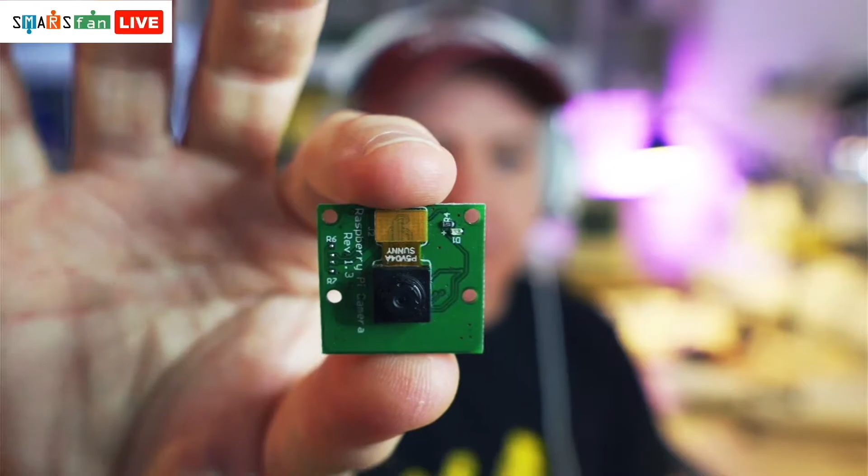So it comes in two parts. There's a back piece and then there is a front piece. And if we get our Raspberry Pi camera, there's the Raspberry Pi camera module. It hasn't got the ribbon installed yet. And we try and put this in there.

Although it looks like it might actually fit in there, there is a very large hole at the front, and there's no way for this to actually go inside the actual holder. If I can show you that, it doesn't quite fit. So you try and squeeze it in there. There's nowhere for the ribbon to come out. It doesn't really work. And on the version that I printed out, I think it was actually the PLA that was the issue here, but this actually snapped off.

So I thought we can do better than that, and I thought this is quite an interesting exercise to do. You know, how do we solve a problem like this? We want to design our own camera module holder. We've got the tools such as Fusion 360. So how do we do this?

So that's what today's episode is all about. We're going to use Fusion 360. I'm going to build a new camera module from scratch. So what do we need? We need a Raspberry Pi camera module and we need Fusion 360. So that's the Raspberry Pi camera module that I've got.

And what do we need this to do? Well, we need a hole for the actual lens itself. We need a ribbon hole, so when the ribbon goes into it, we've got somewhere for it to come out.

And what would be really cool for bonus points, if we have time, is rather than having this round connector on the back which connects to this sort of array - see, I've got a piece of blue tack there just holding that in place. At the moment this just kind of wobbles about, so I just put a piece of blue tack in there to sort of hold it into place a bit.

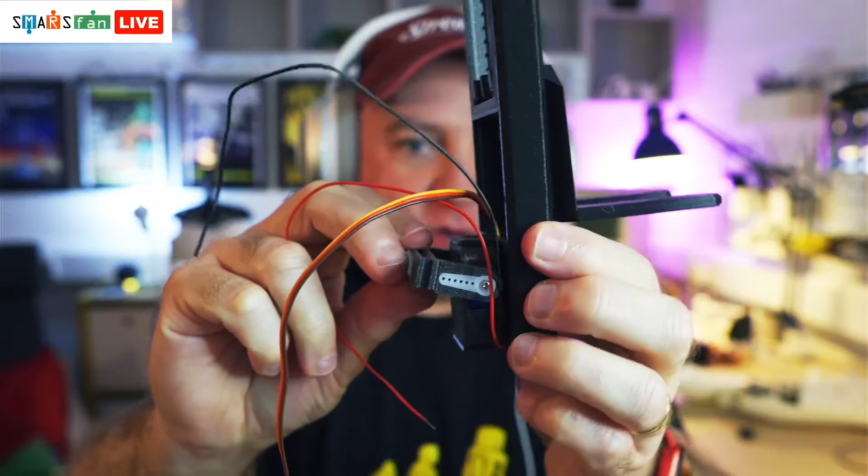But what would be really cool is if we could have a servo that can actually position the camera up or down, a bit like we have on - I'll just pull one of these up here - one of these module holders. So there's essentially two parts to that. If we just move this away, this is the forklift thing. So there's a servo holder in there. You can just see the servo horn there, and then this slides into the top of the SMARS. So it'd be cool if we could have something like that for bonus points. Might not have time to do that today, but that's certainly where I'm thinking we should go with this.

Okay, let's get back to our keynote and back to that. So that's what our requirements are for this solution. And the dimensions - this is all about measuring things and being quite accurate with this.

So I have a pair of digital calipers, and these things are actually on all the time. I don't know if this is just a cheap digital caliper. However, it appears to be switched off. As soon as you sort of move this in any way, if you just open this up, you'll see it springs into life there. And there's a tiny little watch battery in there. And because this is essentially always on, these things don't last very long, the batteries. So I've seen people hack them together where they've got a battery stuck on the top or duct tape to it or whatever. Just something that irritates me.

Anyway, so we have our calipers, and one of the things we'll be doing is measuring exactly what the dimensions of this are.

So for example, on there you can see that's roughly 24.8 by about 24. It says 23.93, so it's about 24.8, 25 by 24, something like that. So we have some measurements that we can start taking there.

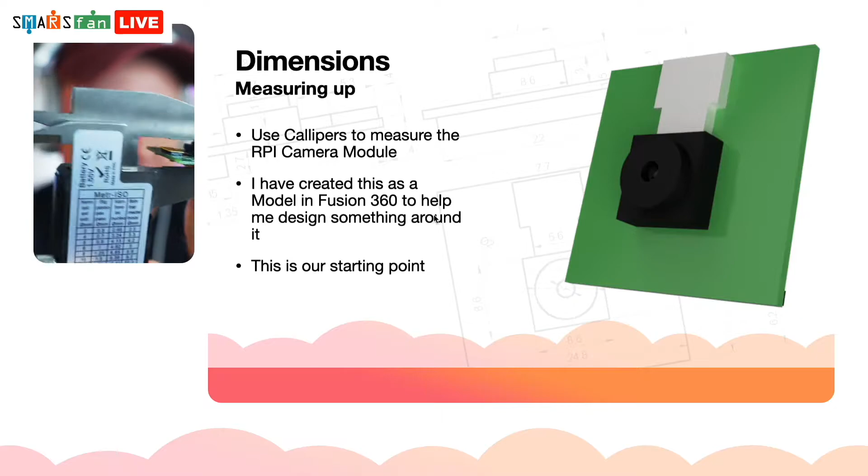And we have to measure things as well, like the height of this thing. So what's the total height, including the little ribbon connector there. If I show you that in a little window, you can kind of see what we're getting, and that's saying about 8.2, something like that.

So I've written all these measurements down, and what I've actually done is model this in Fusion 360 as a component that we can pull in, because it's much easier to build around that. Essentially we want to get this and then encase it in some kind of module that's got the right connectors and the right holes on, and then slice it down the middle. So it gets quite an interesting problem to solve.

So that's our starting point. As you can see, or maybe you can't see there, I'll help you with that in a moment. I've modeled this, and in Fusion 360, once you've designed something, you can actually create a sheet from that, a drawing that has all the measurements on with all the different views - a top view, a side view, front, back, all the different orientations.

You can even do a section analysis where you slice through the middle of it if that's important. What this means is that you can pass this to somebody else and they can recreate this very easily. So I'm quite a big fan of these, and it takes me back to my days of high school.

When we used to do, what do we call it, graphic design, or technical drawing, that's what we called it. We had pencils, and we had the big sort of boards where you'd get the paper on there, you clip it on, and you'd have to draw out things. We drew things like the Volkswagen logo. I remember that being one of the things we had to learn how to draw. This is kind of the thing we had as a sketch to draw from.

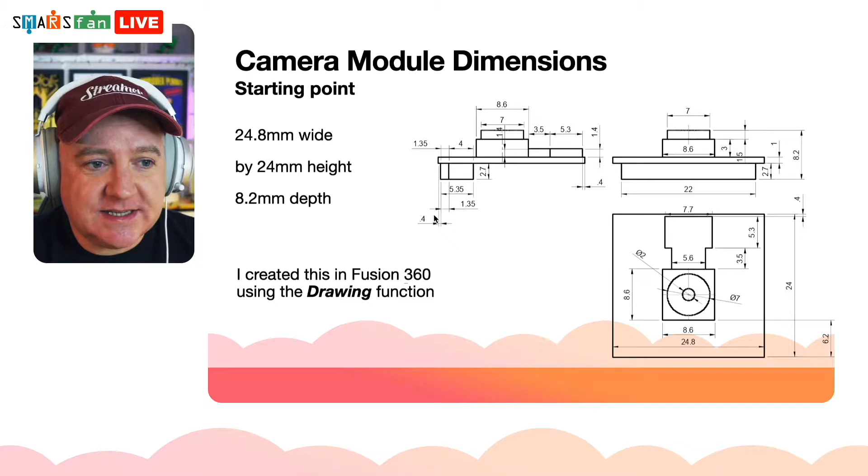So that's our starting point. I've created that as a drawing, and you can get a copy of that if you want as well. So I've created that as a PDF.

What we want to actually end up with is a module that has the Raspberry Pi in the middle, and it's going to be encased by a top half and a bottom half. The idea being that these top and bottom halves are perfectly designed so that they have all the supports and everything needed, so that thing is snug and enclosed properly. We also want it to look like the SMARS kind of design language, so we'll talk about that when we get to it.

So like I said, there's a top half and a bottom half. There's a hole for the camera lens that's the right kind of size for the camera, rather than having the great big hole that this one has. It's a push fit connection, so when we print it, we don't really need to do anything else other than push these together, and there'll be a friction fit. And we have a hole as well, you can probably just about see it there, for the ribbon cable to come through, and on the bottom half there's a cutout for that too.

So I've actually printed one of these. That's what I have installed on this guy here, and I have another one, a slightly different prototype I'm currently working on too, which is just here. It's got a Raspberry Pi 4 just dangling on the top there - it might be a 3 - but yeah, it's got the same kind of module there on the front too.

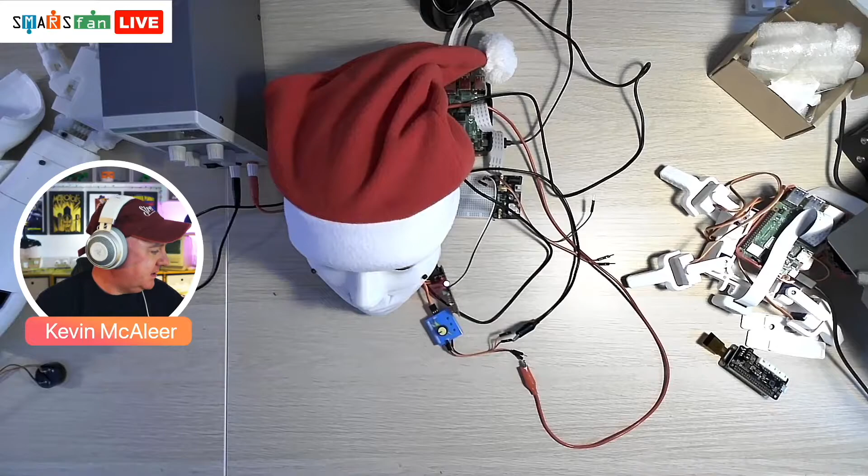It's demo time, and I've got a note to myself to play some cool music in the background, because we're going to be doing a lot of talking and clicking, so it'd be nice to have something playing. I've got a bit of a playlist here we can use. I'll just need to turn the volume down a bit since it'll be quite loud. Let me play that. If I put it down to about there—how's that? Not too irritating.

Okay, so what we need to do now is go over to Fusion. Let's get to it. I've got Fusion 360 loaded up here. This is free software if you're a hobbyist or a student in education.

You might have to find your way through the Autodesk licensing system to get the license, but I found it quite straightforward, and they're always updating the software. This is the best software on the market for doing 3D design, especially if you want to take that and put it onto a 3D printer and print a model. I find this is just the best software, bar none, and I've had to play with a few of them to make that assessment.

So this is what we're using. I've got two setups here—one view, and a slightly more zoomed in version I can click to if something's not quite visible on the screen. Okay, so the first thing we're going to need to do is create a new sketch.

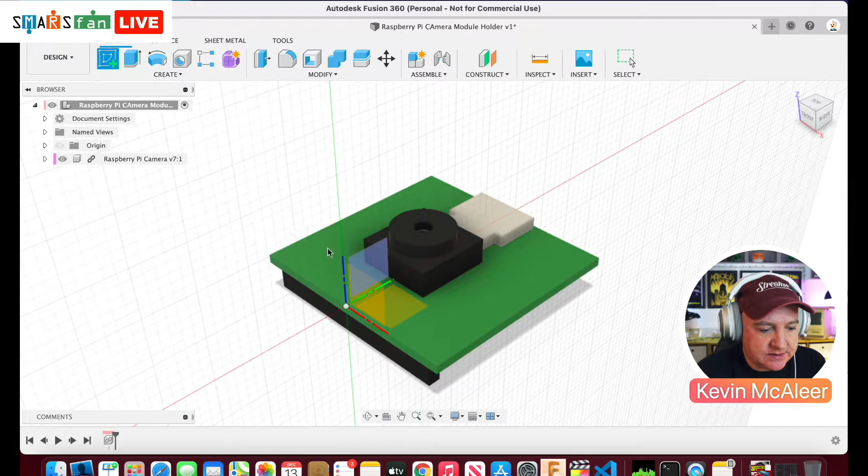Let's do that on this plane here. We can hide that Raspberry Pi module when we don't need it, and bring it back just by pressing this little eyeball. The first thing we need to do is capture the outside dimensions of this module and then build out from there. So what I'm going to do is click on that.

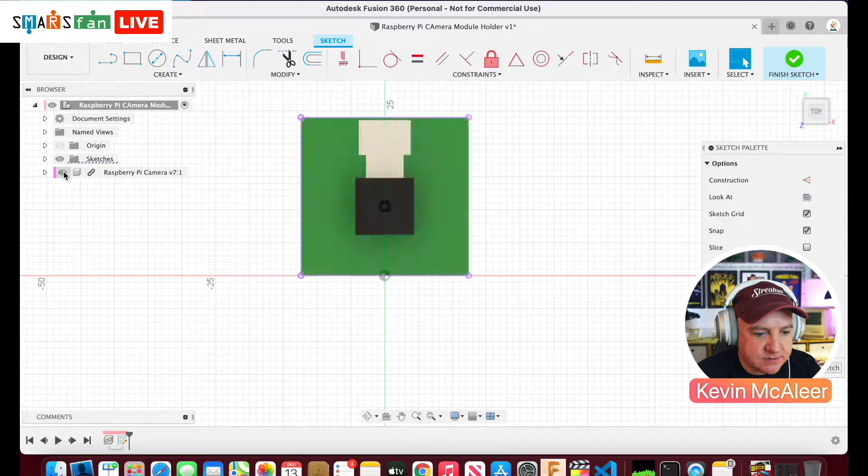I'm going to press P to project, and then click on the edges I'm after—just this edge, and this edge. So what that now means, if I hide that again, we can see we've got some—maybe I didn't quite click that one, let me do that as well. If I hide that, we can now see we've got the outline dimensions of that brought into our sketch.

What we need to do is just draw a rectangle which is exactly those dimensions. If I just do that—there we go, oops. Okay, so we now have that captured in our sketch, and what we want to do is build an outline around that.

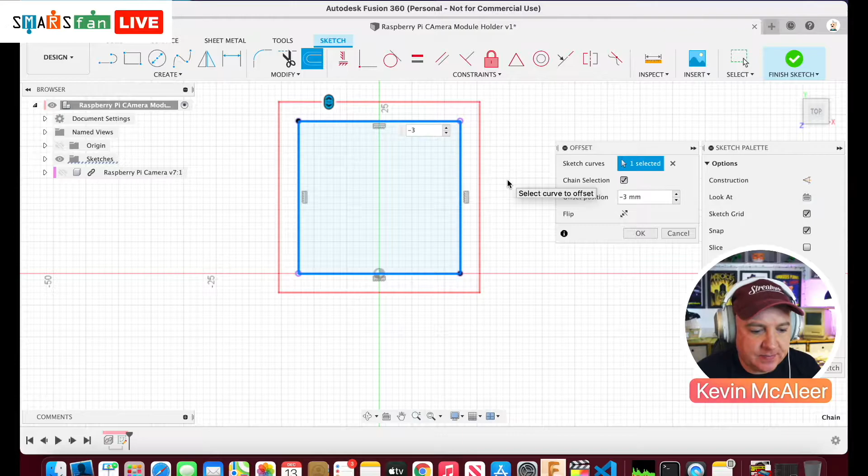There is actually a command for doing offset. If we do -3, that'll offset around the outside of the camera. So this is going to be like the thickness of our case around it. Let's click OK on that. So that's our first sketch done.

That's nice and simple. What we're now going to do is extrude that out, pull that out. So if we go to our 3D view of this, what we want to do is pull this out. I'm clicking into that area there, and I'm going to press Q to push pull, and you can see there we can pull and push that shape we've designed. We actually want to pull it out about 5mm, so I'm just going to type 5 there, press OK. So we've now got kind of a square hoop kind of shape.

And if we bring back our Raspberry Pi, we can see that perfectly encloses that.

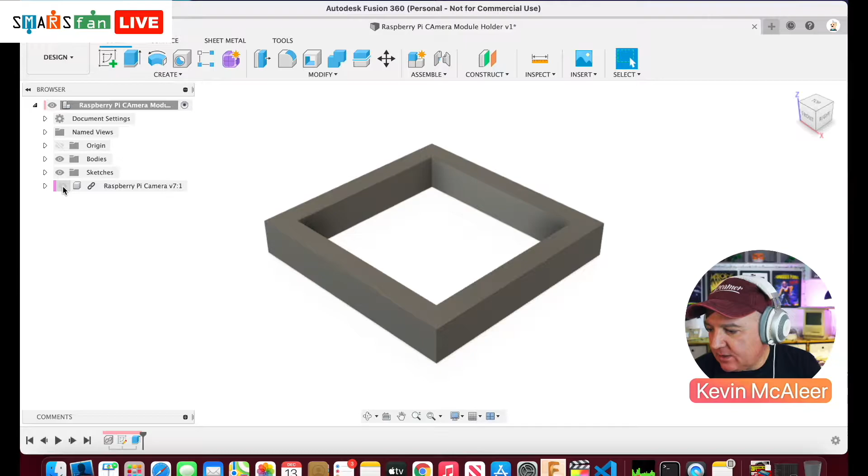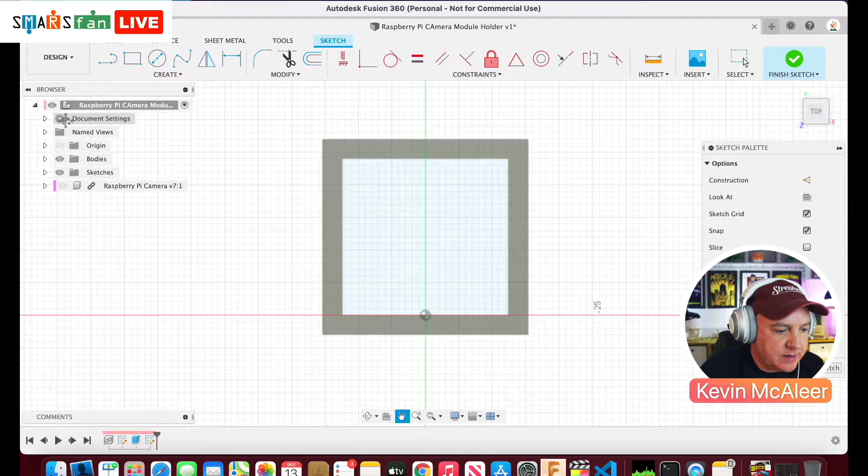Okay, so next what we need to do is draw a sketch on the top of this surface here. So I'm going to click that, go to create new sketch, and let's just bring that down. Why is that? There we go. Okay, so what we need to do now is bring back the Raspberry Pi camera.

I want to draw a circle exactly where the lens center is. So if I zoom in on this, let's just zoom in on that. Exactly where the middle of this is, that's kind of what I want to do. So if I do P for project again, I can actually find that circle there. I'm just going to bring that in. That's all I need, because that's where the light goes into the camera.

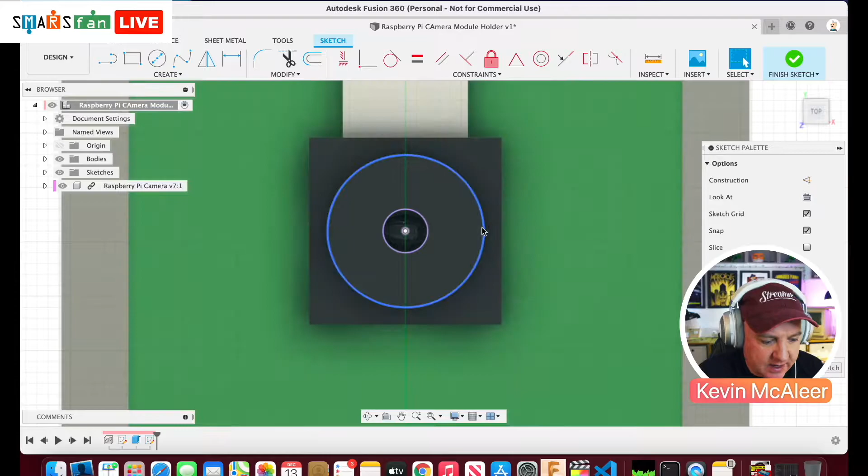Everything else is just for show, but we might actually make a similar one that goes out around the outside as well, because it just looks nice. So I'll do that, pull that one in as well - P for project, bring that in too, and then do an offset around the outside there as well, and that offset is going to be 1mm around the outside, so that's fine. And that will be the gap. Everything within here, if I just show, all of that area there will be the hole.

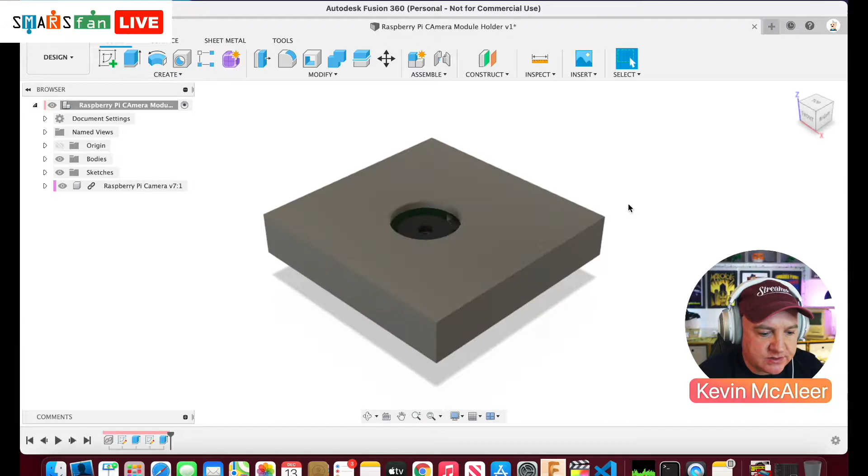Okay, so that's the next bit we need to do. So what we now need to do is go back and finish that sketch. We can now bring everything we want to pull up, but not the hole in the middle - just this outside area here and here. Press Q to push pull, and we're going to pull that up just 1 millimeter, like so. So now you can see how this is sort of coming together.

Okay, so what we now want to do is go to the bottom half of this face here, and we want to do a push pull down on there as well. So if I do Q, I can actually pull that down by 4 millimeters. And if we look on the side there, we've kind of completely encased that Raspberry Pi within the case.

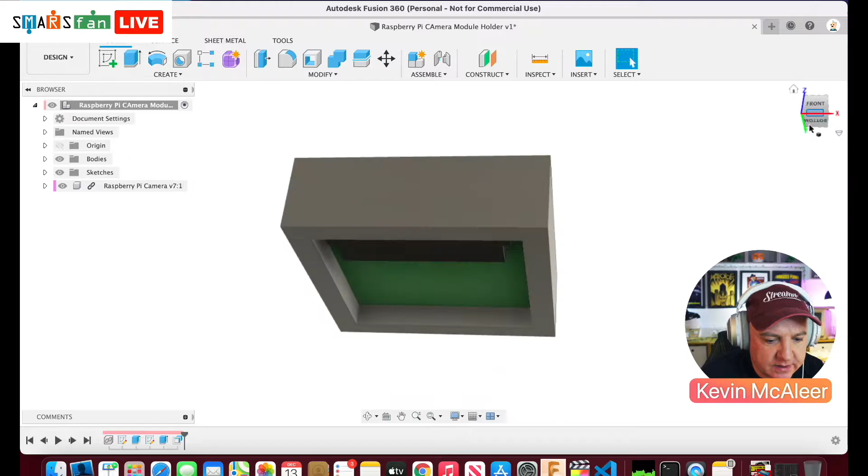Okay, so what we want to do now is fillet the edges. Let me just make sure I've done that correct. No, I've not - there's one more thing I need to do on the other side on the bottom. So let's go back onto the bottom there. I'm going to select this face, create a new sketch on there, just move that to there. And I'm just going to do a rectangle from that corner to that corner there. Make sure that is... it's not quite getting it to the edge there. There we go, perfect. So I now just want to grab that and that, pull that down by 1 millimeter.

Okay, so now we've completely encased our camera. Camera's inside, there's a hole for it to come out, there's no ribbon hole yet, and it's looking quite blocky.

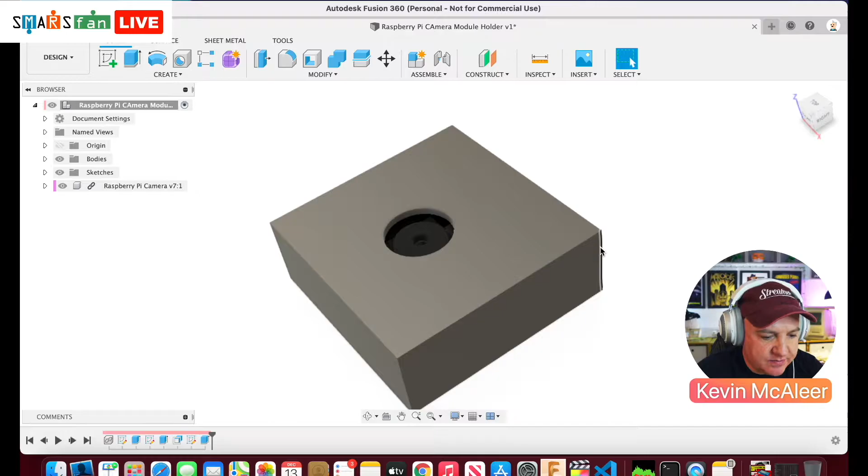So the next thing we're going to do, we're going to fillet these edges. So if I just grab this edge here, press F to fillet, and I push that in by 4 millimeters, and then I just select these by holding down the command key on the Mac, and that one there. We've now filleted those 4 corners.

Now the reason I picked 4 millimeters is the original SMARS - if I just find one, I'll pull this up here for a second - the roundness that's on these edges here and underneath here is part of what gives the SMARS its kind of unique look, and we call this the design language.

So this design language that we use for the Mac, I've got the Mac in the corner and I'll tell you about that in a second. The design language for this, we want to make sure that everything we design as a module add-on has the same kind of design language, because then it looks like it's a perfect fit and that it was always part of the original design. So it's just a little tip to think about when putting this together.

The reason I was thinking Mac there, as well as having a little Mac behind me on camera, is that Mac Classic - when they designed that, the design language was called Snow White, and they kept that for quite a while. All the printers, mice, even a modem, lots of different add-ons and extras, all had the same kind of curvature, the same look, the bezels were all the same. That's what I mean by design language. They changed that after a while because it did look dated quite quickly.

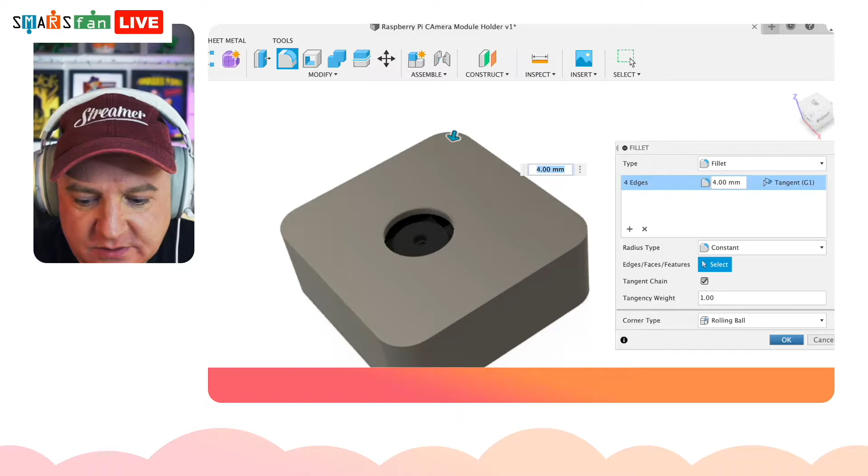Okay, so we've filleted the edges there. Let's go to the full screen so we can see what we're doing. That's better. And what we want to do next is a few more fillets. Let me just OK that.

So this edge here, I'm going to fillet this edge, and I'm going to do that by... is it 2? No, it's 4. Sorry, 4 millimeters. It's the bottom edge that's 2. So I'm going to fillet that bottom edge. F for fillet, 2 millimeters, and there we go. This is looking a lot more like what we want it to.

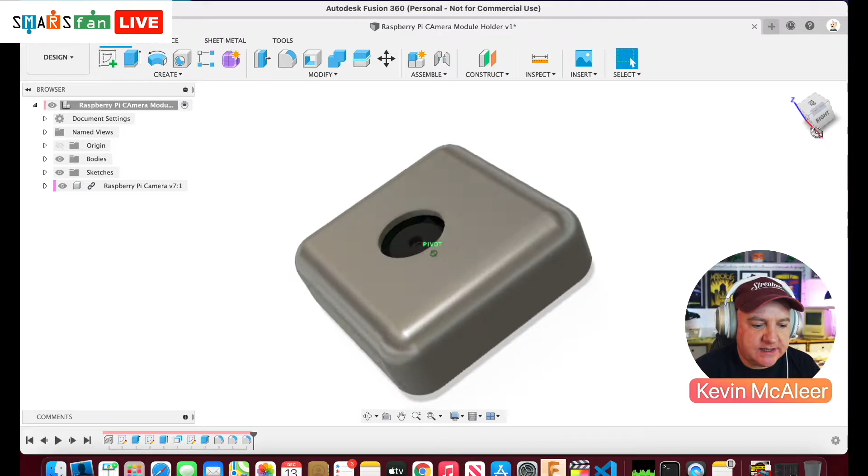Okay, now what we want to do is split this into two halves, and the easiest way to do this is by creating a plane. So we're going to select this top area here, go to construct, and do an offset plane, and I know that it happens to be -9 millimeters. That's where I want my cut to be. Now that hasn't done anything, it's just put a plane on the design, and we're going to use that to create a split.

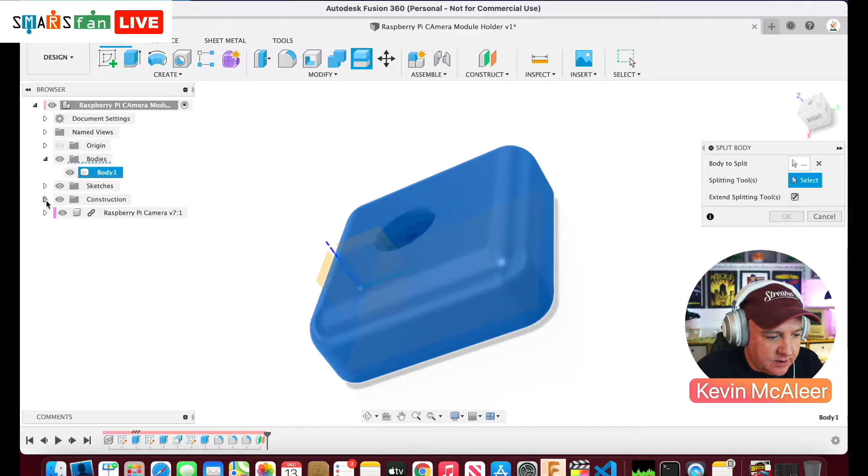So we want to modify and split the body. The body to split is this body here - there's only one body at the moment, which is body 1, and the splitting tool is going to be that plane. So under construction we have plane 1. That's what's going to happen - it's going to use that to slice through and create two bodies.

So if you look over here, we've got body 1. When I click OK, we've got body 1 and body 2. And if I turn them on and off, you can see that we literally have a top half and a bottom half. So I'm going to click on here. I'm going to rename this to be back, and then this one to be front.

Oops. So let's have a look. Let's just put that as front.

Hey Dr. Elo, how you doing? Thanks for joining the stream. Yes, it's really flying along this new Apple MacBook M1. No problems at all with this.

Right, so that's the front and back section done, and that was very easy for us to split. Now the problem with that is that these have no kind of purchase on each other - they would literally slip and slide around. So we need to design something that's going to latch these things together.

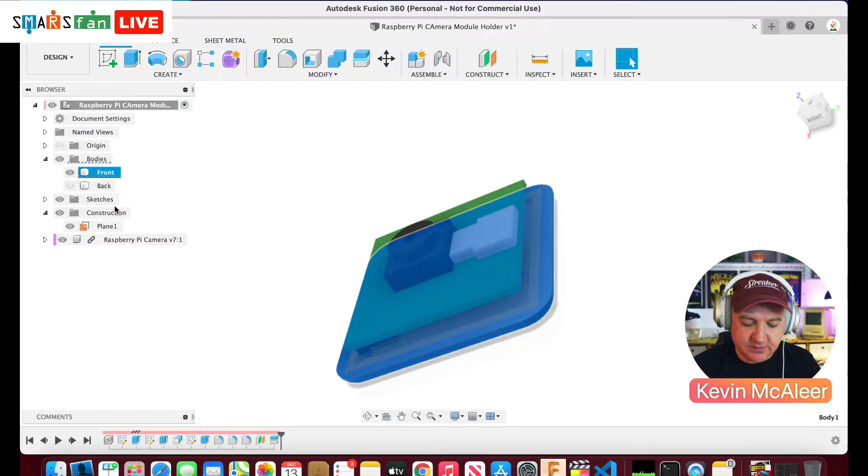So what we need to do is design exactly that. I looked at the original design that Kevin Thomas had done, and what he's actually created there - if we can zoom in on this a bit - you can see there's kind of an inset area. It's quite hard to see because it's white and bright. There we go - so there's kind of a square rectangle all the way inside, and with this one there's also a sort of wall around the outside, and these things when pushed together create a push fit connection. So it's quite strong, very simple for us to do.

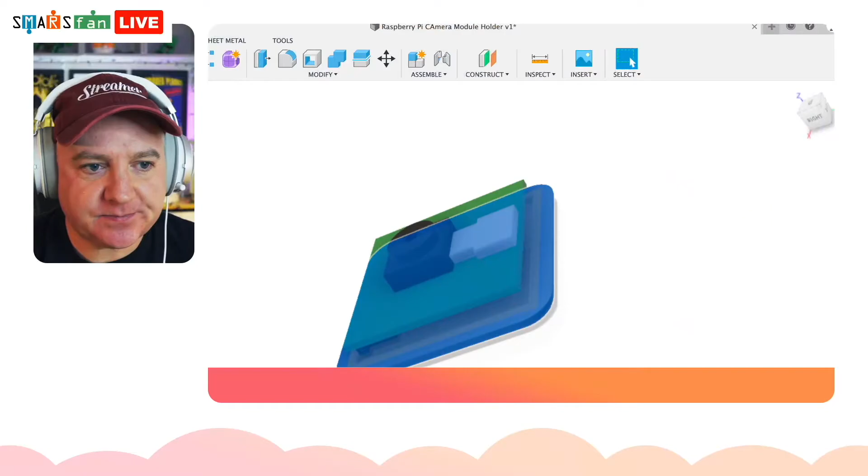So that's what we need to do - we need to design that little insert rectangle, extrude it out. So that's what we're going to do next. Let's just go back to the full screen there. So let me pull it.

So what we need to do is we need the back piece, and we need to turn off the Raspberry Pi camera. Have I named them incorrectly? I think I have - I think that's actually the back piece. I think that's actually the front piece.

Well done if you were following along and you spotted that. Right, so we've got the back piece, and that's the piece that we want to look at. So let's get this up.

Dr. Elo's asking, is this for 3D printing? Yes, ultimately we're going to 3D print this part out for our robot. This part here is what we're actually going to create - a little camera holder. The camera is a tiny little component like this, and we want this to sit on the robot, which has a pivoted area we need to create. The one that comes with that design isn't really suitable, since the camera module holder wasn't designed for a Raspberry Pi. So we're just going to recreate that in Fusion 360.

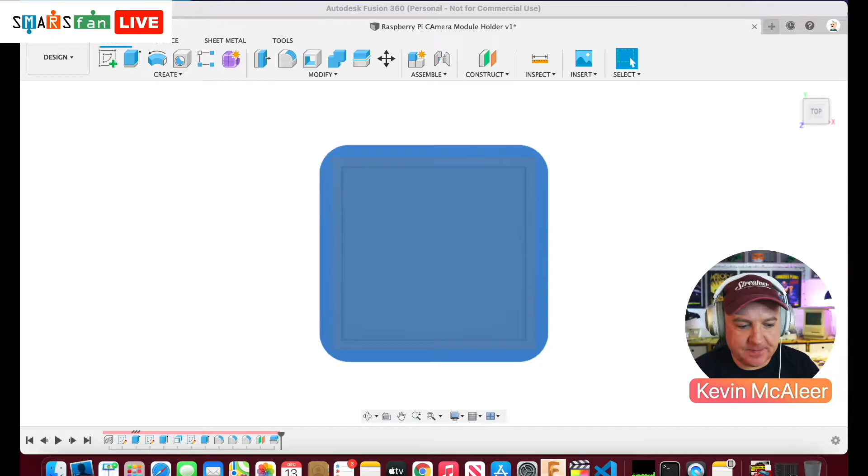Okay, so there we go. We've got our holder there. What we need to do, let's just get this so we can look at it properly, and we want to create a sketch on there. Right, there we go. And what we want to do is a rectangle.

Let's make sure I've got all my settings correct here. We've got snap to grid - I don't think we want that on actually, I think that was getting in the way. There we go, so we can draw a rectangle like that and then use this coincident constraint. If we click on that and that point there, and then click on that and that point there, outside edge, minus 1 millimeter actually.

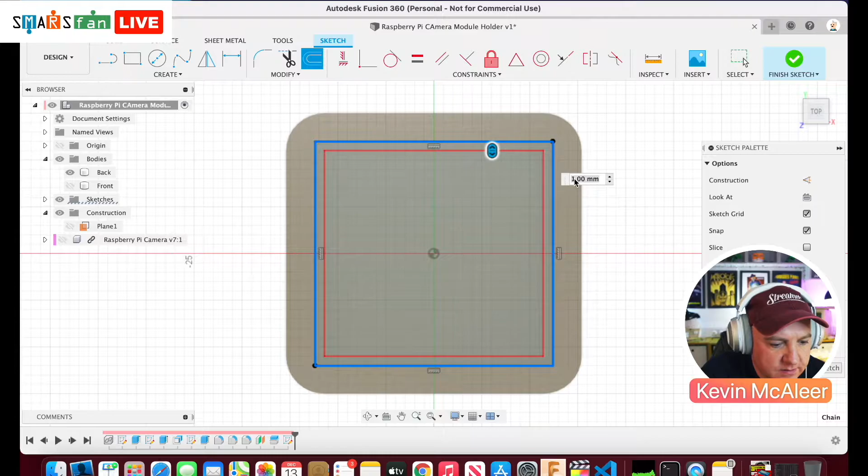So let's just go and edit that again. There we go. And that's eaten into the outside of the frame, but that's fine because we've got quite a nice rounded edge there, so that's not going to be a problem for us.

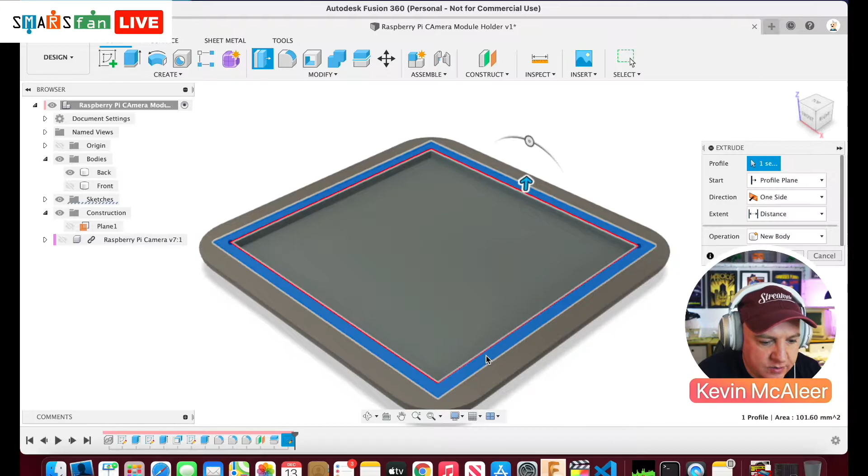And what we then need to do is finish that sketch and pull that up. If we just get to there, we can grab that area just inside there. I can zoom in. So let's just grab that area there. Press Q to push pull, and we're going to pull it up by 2 millimeters. So 2 millimeters tall, like so. I think that's what we're after.

Now, what I didn't do on there was actually cut that into the top, the front piece. So what I need to do is go back into there. Instead of it being a join, I need to make it a cut, and where it says objects to cut, we want to make sure we have the front piece selected there. So what that's going to do is cut a piece out of that front piece.

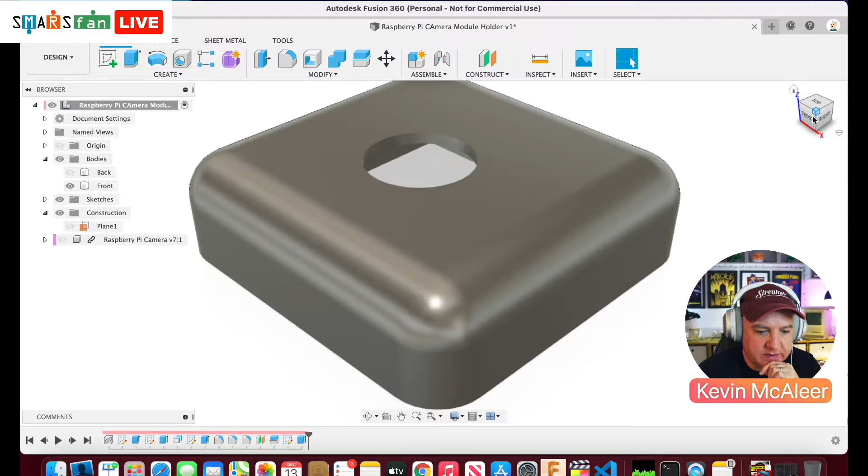So if we now look inside that, if we flip this over, let's flip it over there, we can now see we've got this inner edge. So what we then need to do is go back to the back piece and draw that same piece again, but this time back on there again. We can use the same sketch, so if we go to the sketches, we can make sure that's enabled there so we can see it, and then push pull again on that same area.

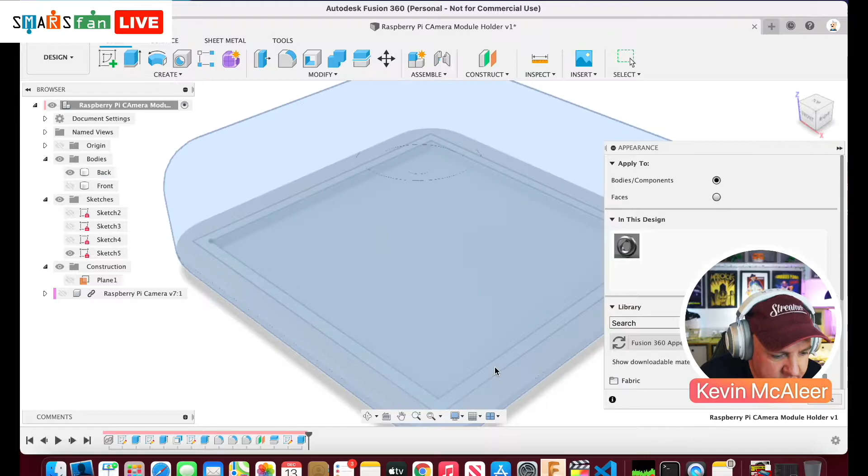So we just need that inner piece, not the whole piece but just the inner piece. Let me zoom in a bit to get closer to that. There we go. So it's just that piece there. And we want to move that up again 2mm. So we've got a cutout area and we have this now extruded piece.

So what we can do to make sure this actually works, because when we put them two together we can't see inside it - within the inspect tab, we can do a section analysis. If we do a section analysis there, we can cut all the way through. Let's have a look at that. We can see from there that these things perfectly fit. So that's good. Okay, let's go to the next bit.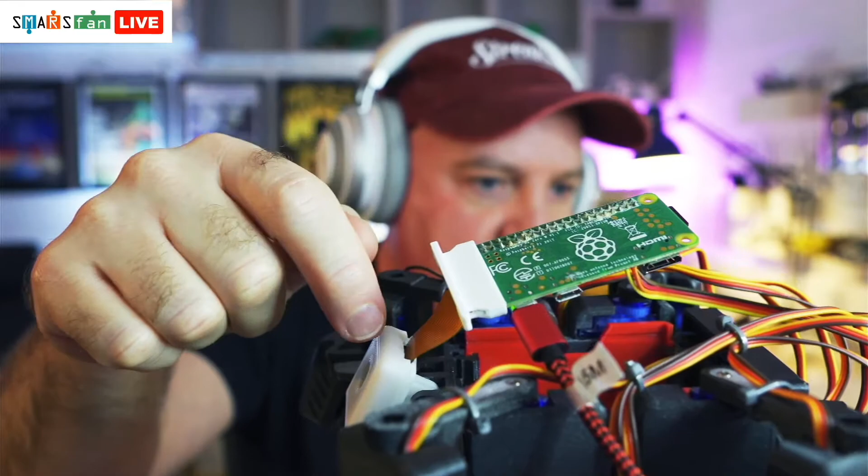So what we need to do now is create the area where the ribbon cable can come through. If we have a look on the model we've already created, we can see where this ribbon cable is coming through there, there's a little area that's cut out just for that.

So the original one didn't have that, and this is something that we need to put in there. We can turn that section analysis off just by going down to section analysis here, opening up that disclosure triangle, and turning off that little eyeball. So we only want to see the back piece, so we can turn off the front.

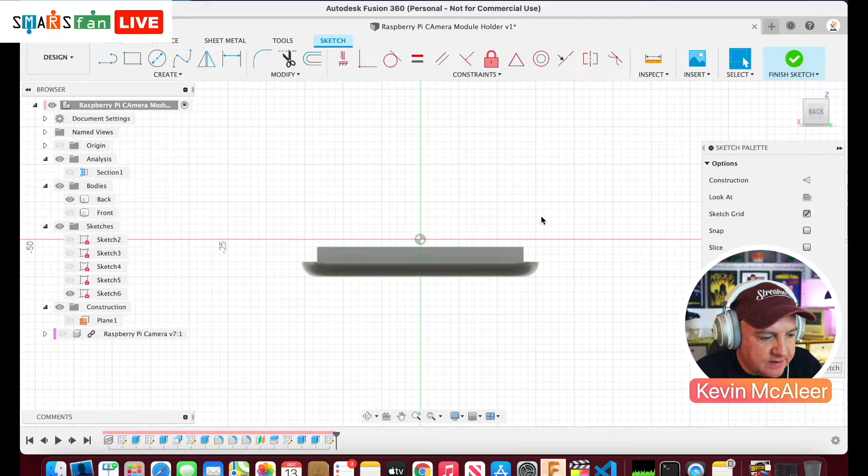We can just get a better view of that, and we're going to do it on this side here. So if I move this round so that's the area we want to do the sketch on, click sketch, and if we click slice, that will slice through because we're going all the way through the device.

My camera's gone off again. Something's really not happy, and I think it is this hub. I think it's just not very good quality. I'll have to look to replace that this week with a much higher quality hub. I think it's like a USB 3 hub, and this is Thunderbolt 4, which is far superior to all that. So I think that's what the problem is. Everything's glitching out on there.

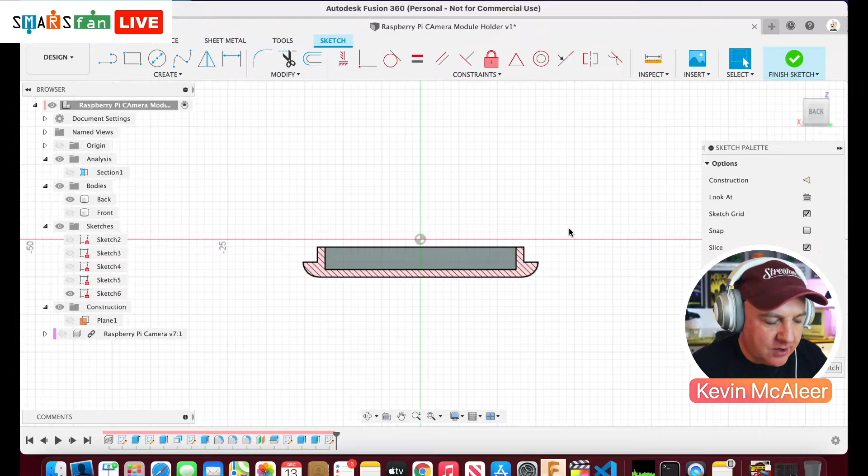Okay, so now we've got that, let's zoom in a little bit so we can see a bit better what we're doing. There we go. And we need to do a quick design, which is 16.5mm from that center point.

So let's create a line with L, and if we press X, it will enable this construction line. If we just do a normal line, let me just show you what that looks like - it draws a solid line. If we want to make that line dotted, as in it's only a construction line, we can click that, or I just get rid of it altogether. When I press L, I can press X to enable that construction line.

And I want to go to this center point here and pull this some way down. Doesn't have to be a specific height, but that gives us a nice section from the middle. And then what we want to do next is create a rectangle.

I'm just going to draw a rectangle like so. We do want that to be a solid one though, so I'm going to make sure that these lines, just highlighting them, pressing X to switch off the construction line.

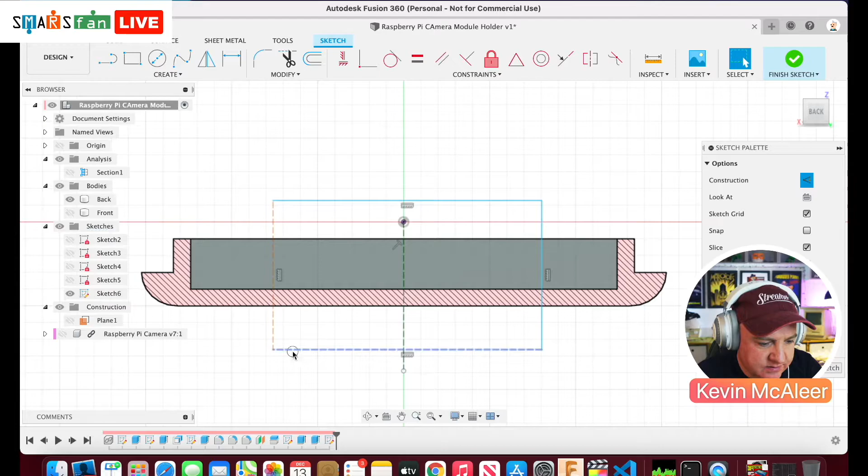So like so, and in the middle of here there will be a midpoint. So if I just grab this and make sure that the midpoint of that is the midpoint of this line here, that's now exactly in the middle of this piece, this back piece.

So what I want to do now is dimension that. I'm going to press D for dimension, grab that line there, and we want that to be 16.5. Like so. And it doesn't matter what the length of this is, as long as it's deep enough to cut through.

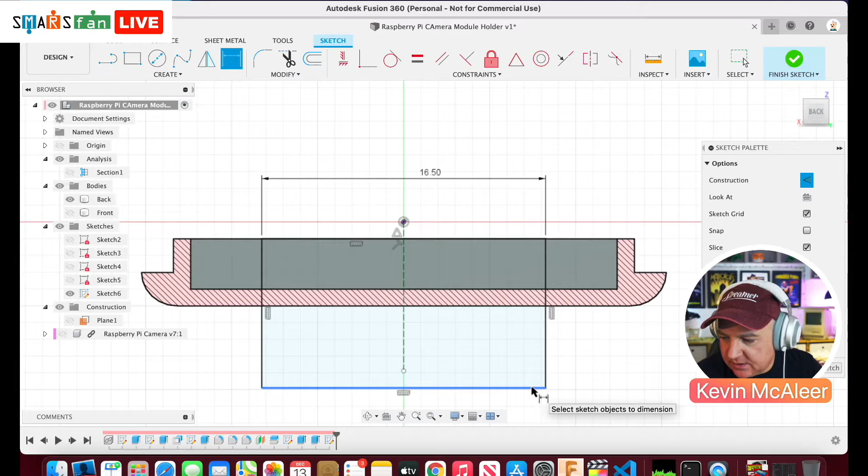So what I'm actually going to do is make that very bottom line collinear with that line there. There we go. So let's just get a better view of this.

So if we look at this like so, what we want to do now is just push that through and cut it out. We can do that a number of ways, but I think it's easier to grab it from there, highlight the area, press Q to push it all the way through like that, and on the options here, which is just behind my head, we say the distance is all, so go all the way through, and the operation is cut because we want to cut it out. And there we go, we now have our hole all the way through.

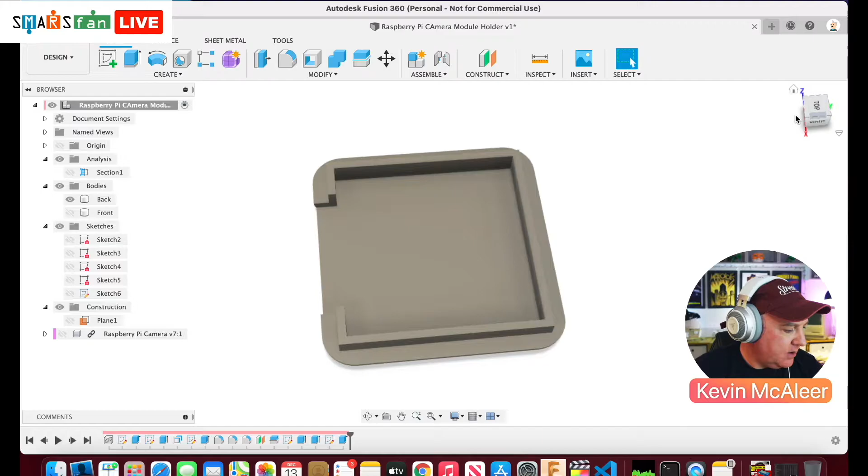Okay, so next what we need to do is - the camera module itself has this little ribbon connector. I'll just bring it back in there. You can just see there, it just sticks at the bottom, this sort of black section with a white connector on it. But the rest of the module hasn't got anything to sit on, so we need to create a little thing for it to sit in, a little channel.

So we need to create two little lines that can sit at either side of the components. What we need to do next then is just create these little channels. So let me just bring this round, go to the top view, and spin it around like that, and then on this bottom face here we're just going to create a new sketch with these two rectangles on it.

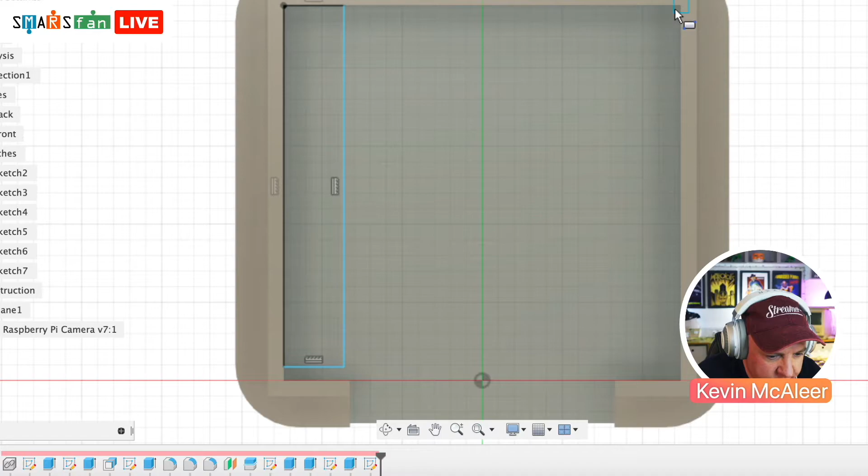So let's just do rectangle 1 like so, and that's going to go all the way down. Let's just do it like that, and then another one like so, and then we can dimension these out.

So we want it to be 3 millimeters from that edge there. Let's just do a dimension of that edge for 3 millimeters. And then this one we can click, and instead of typing it we can just click on that 3. Let me show you there because you can't quite see. So I've done 3 millimeters of the dimension, and where the dimension is there we can just click on that 3 and it will copy the dimension like so.

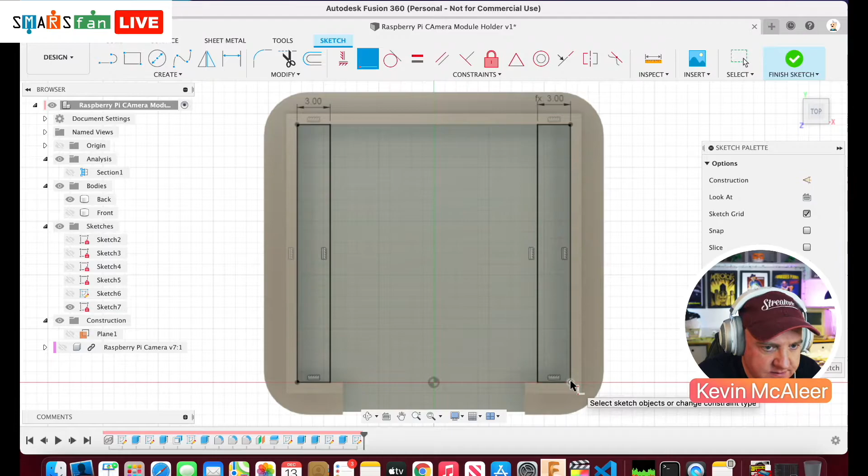And then what we need to do is make these coincident with that bottom corner there. So if I make that coincident with that, and that coincident with that, then we have what we need. So now we can pull them up. If I go back to there, I select it, press Q, and select the next one, press Q.

Now we want to pull it up by 3, and actually those dimensions were incorrect. So if we go back to our sketch, we can just edit that one there, and it should actually be 1.5, like so. There we go. And because they're both the same, it's updated the other one. There we go, that's good.

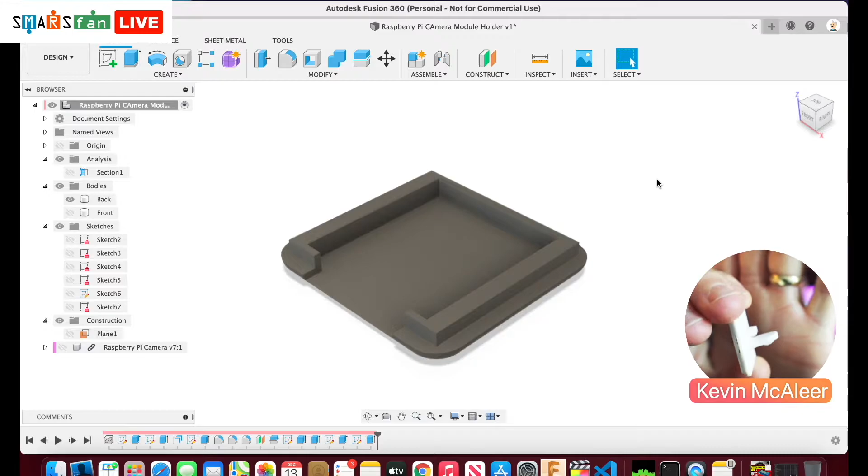Okay, so what we need to do now is flip it over and create this connector that's on the back piece. This connector piece is an interesting sort of design. I don't know if we can get a really good view on this. Let's see if I can get it really close to zoom in.

So it's kind of got a round module. There's a circle, and if you can just see there, let's try and get the right angle on this. So there we go, it's got little dots all the way around, and they sort of grip. That's the idea. So we need to create those little indentations as well.

Okay, so let's go back to our screen. So let's flip this over. We want to go, instead of being on the top, we want to be on the bottom. So let's flip this round, and let's create a sketch on the back.

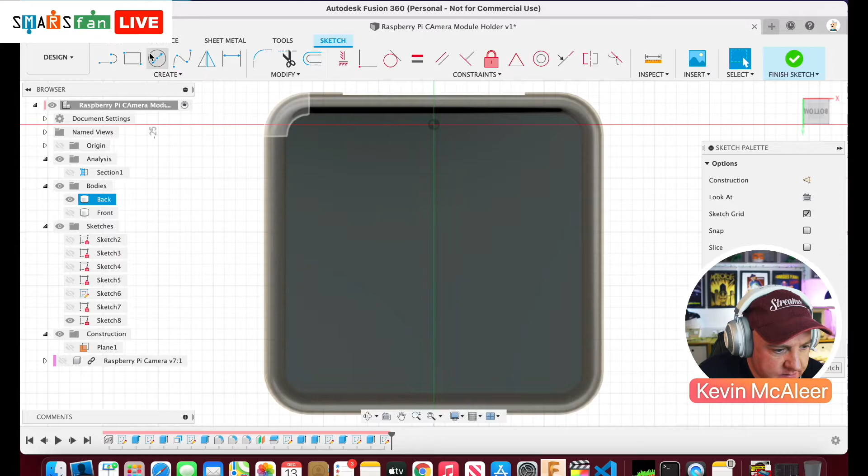Okay, so we want a rectangle on here, and we want the rectangle to be like so, and let's dimension it. We want it to be 8 by 10. 8 by 10. Okay.

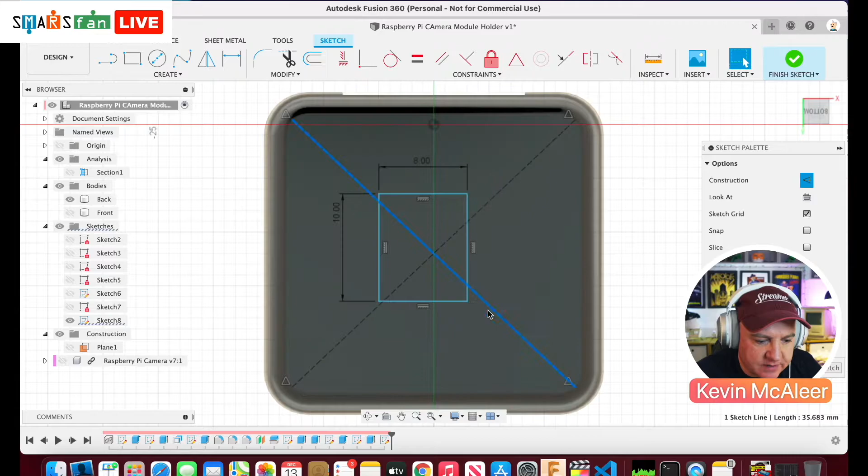And what we want as well is this to be exactly in the middle of this piece. So what I might do is create some lines from here. So one line from there down to there. You can just see they lock into place from there to there. And I'm going to make them construction lines, because if we don't have them construction lines, you see how it's highlighting various different parts here? We don't want that. We just want them to be there for our internal use. So if we make them construction lines, it doesn't now select them. It doesn't see them. They're just there to help us.

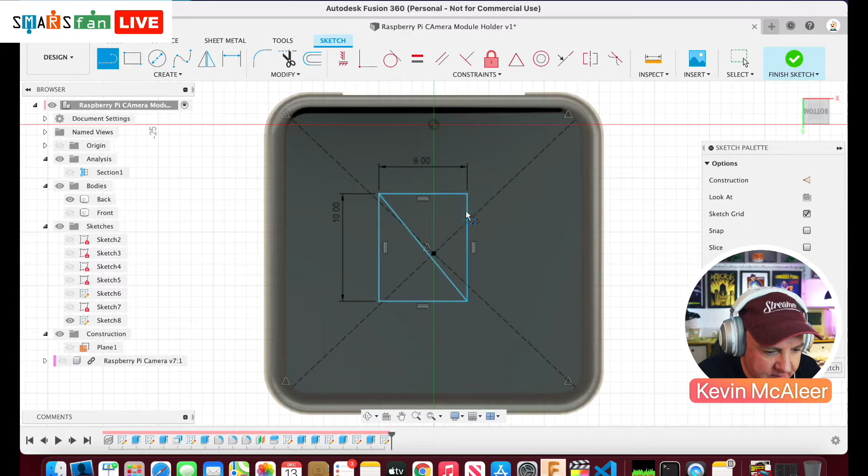And in the very middle where they both coincide, we can create a point. So let's do that, create a point. And now we can do the same with this rectangle. So we can create a line from there to there, from there to there, make them construction lines, and then add a point. So X and X. And then right in the very middle of this, we can create a point. So let's do that just there. Okay, so now we can do the coincident. We can have that point be coincident with that point there. And there we go, that's now exactly where we want it to be.

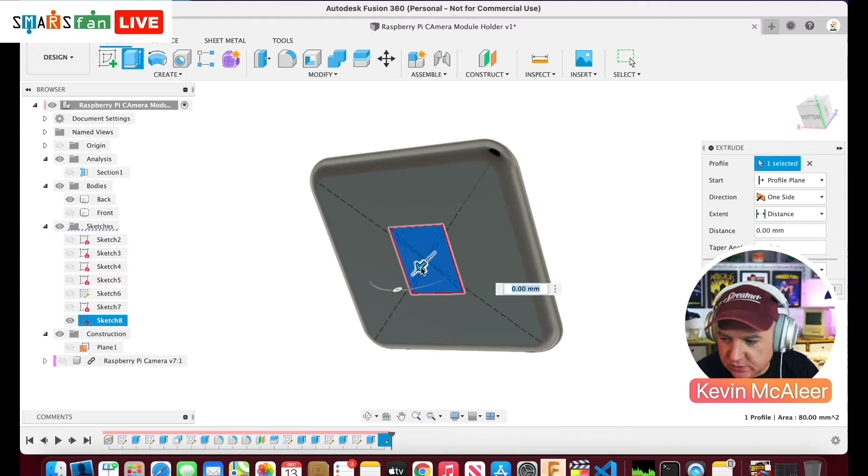So next what we need to do is extrude that down. So let's finish the sketch there. Let's just move it so we can see it better in 3D, and we're going to select the entire area, press Q to push pull, and we're going to pull it out by 13.3. That's the dimension that we need, so 13.3.

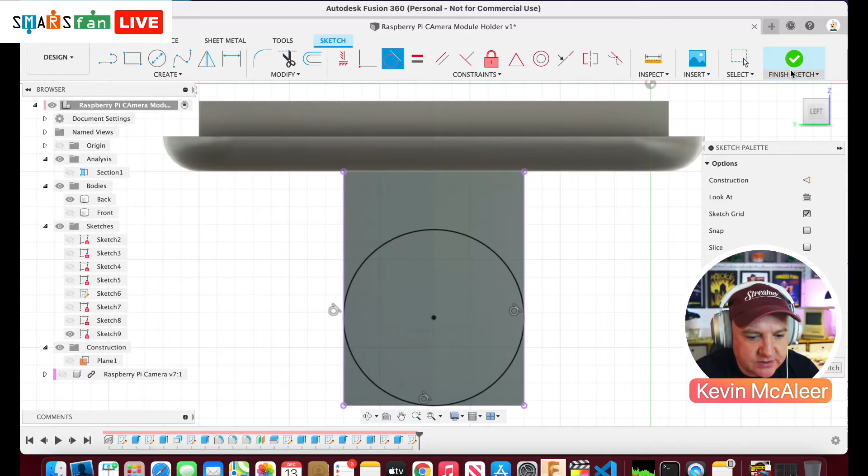So we've got this great big block extending back, and what we want to do now is on one of these sides we want to draw a circle. There we go. And what we want to do is, using this tangent constraint, we want to connect that to the edge that's here. We want to connect the other edge to that edge there, and we want to connect the bottom edge there. So this circle is now constrained to the proportions and outside extremities of this extrusion that we've created, and that's all we need to do for this particular sketch. And then what we're going to do is push pull these two areas out of the sketch.

So if I just select those two there, press Q, and then cut that out, and the distance is all. We've now got this nice rounded looking thing.

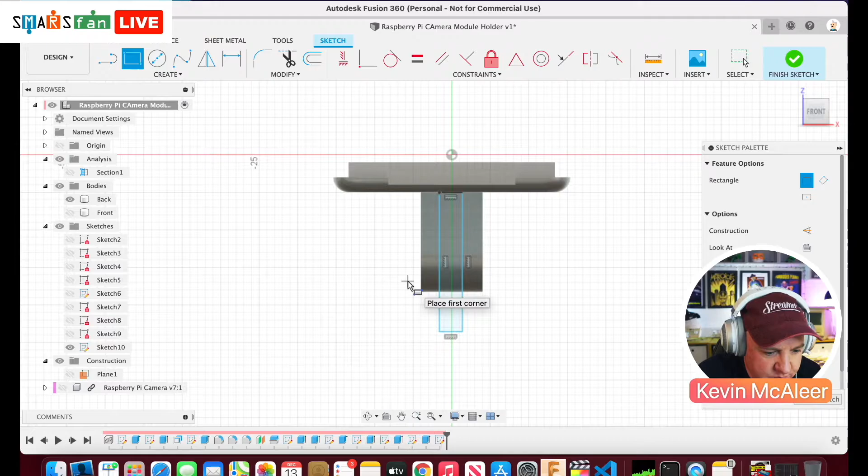What we need to do now is create a split down the middle of that. So we're going to spin this round here, get that particular side, create a sketch on there, and then create a rectangle from that top surface. We don't know what the dimensions are yet, so let's zoom in on that.

They're going to be 2.8 from the edges. So if we do a dimension from there to there, that's going to be 2.8, and then we do the same from that edge to that edge there. Let me just pull that off there. From that edge to that edge, it should be the same 2.8. Okay, that's what we're after.

And then this edge here just needs to be collinear with the bottom, which is just there. Is it picking that up? So let's just do a line from there to there, and then make it collinear with that line. So that goes to there.

Okay, so now what we want to do is grab those two sections, push pull them out again as a cut. So we're going to cut that, the distance is all. Right, that's looking a lot like the module now.

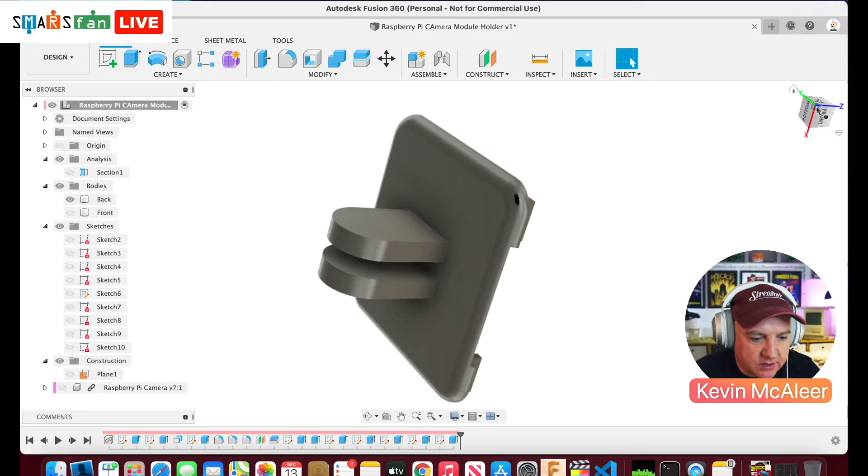So what we now need to do is strengthen this up a little bit. We can strengthen this by putting some fillets on this little area just in here. So if I grab that, press F for fillet, do a 1mm fillet.

I'll just show what that looks like. So if I just zoom in on that, zoom to fit. Let's see if we can zoom in a bit better on that. There we go. So you can see there's this sort of roundedness to it.

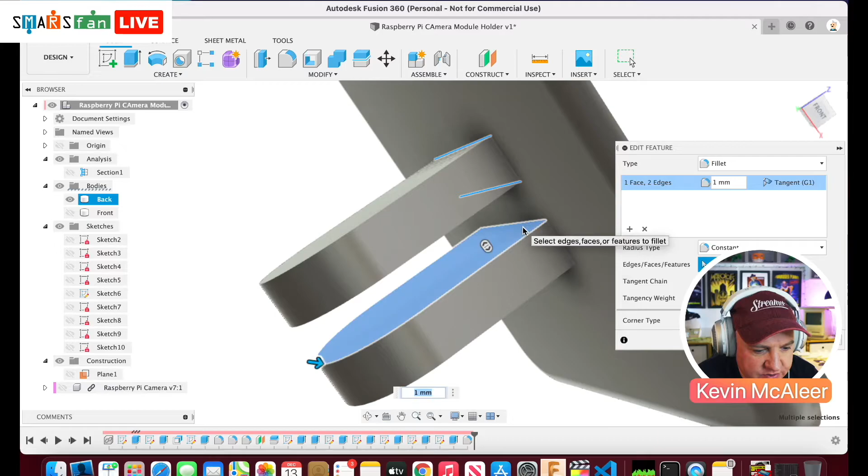And what we want to do is do that on these other edges as well. So if I go back to that fillet, I can include those edges. If I do that edge there, that edge, oops, nope, that edge there, that edge there.

Let's see if that's going to do what we want. That looks good. Yep, so that will give it a bit of extra rigidity, and it also looks quite nice as well. Gives it a bit of extra strength.

Right, so what we need to do now is create those two circles, and those domes on the outside, and then those circles that create that sort of hold effect where it gives it a bit of extra grip.

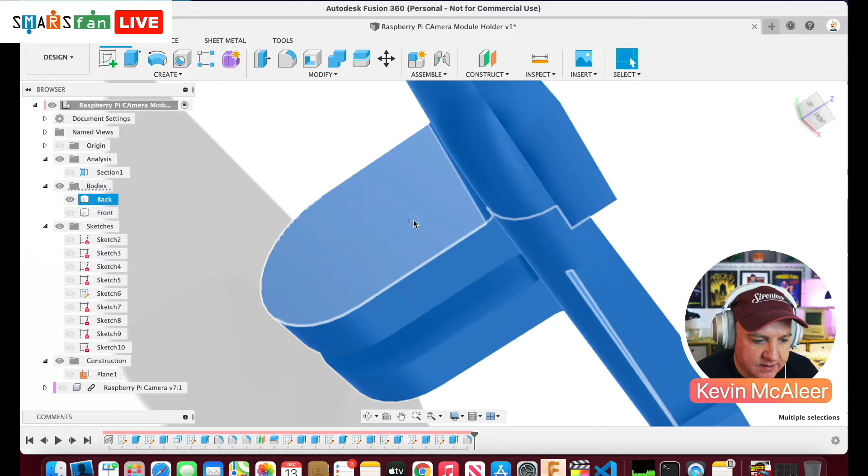So what we need to do now is create a mid-plane. So let's do that. So that side there, and that side there. So we do construct mid-plane. We select the other side as well, and then in between those two we've now got a new plane. Let me just find that.

We want to create on one of these areas here, we do it on this plane here, we need to create a sketch. We want to create a circle, which is, you can see there when I hover, it finds the midpoint of the other circle, which is just there, the other arc. So we want to use that as the middle.

We want to draw a circle there, and we want it to be 6mm. So if we just dimension that to be 6, that's what we would need. And we want to extrude that out. But before we do that, we can actually finish on this particular sketch all the detail that we need for these other details.

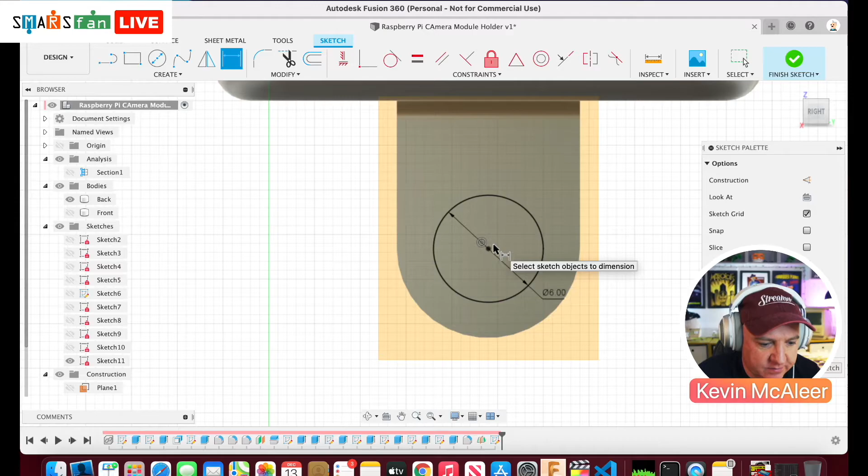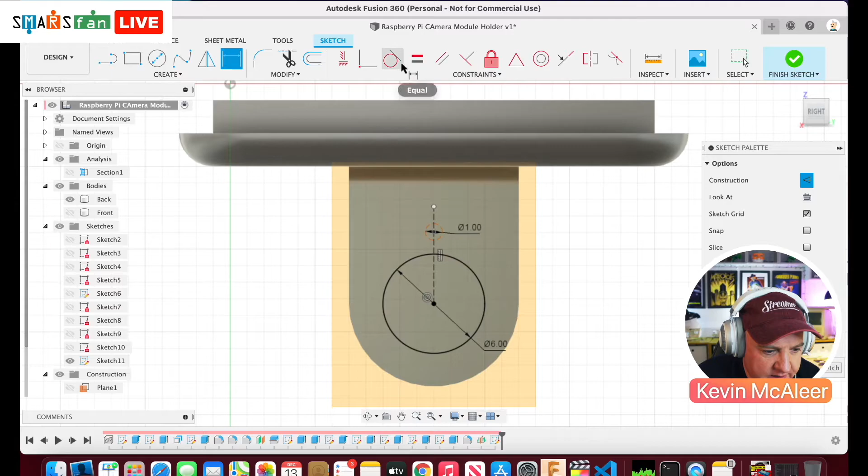So we need a line, so we're going to do L and then X, so we've got a nice dotted line. We're then going to do a circle on that line there, and the dimensions of that circle are going to be 1, and we then need to do the tangent between that edge and the circle, so that's nicely aligned to it.

And actually I don't want it to be a dotted line, so I'm going to select it and press X to make it solid. And what I want to do now is a circular pattern so that this goes all the way around the edge.

So I'm going to create a circular pattern from that particular object. The center point is that point there, and we want 16 of these all the way around. So if I click OK there, we've now got 16 circles all the way around. That's great. So we can end that sketch.

We can now grab that middle circle, press Q to push pull, and we're going to pull this out by 1.75. I found that to be the best.

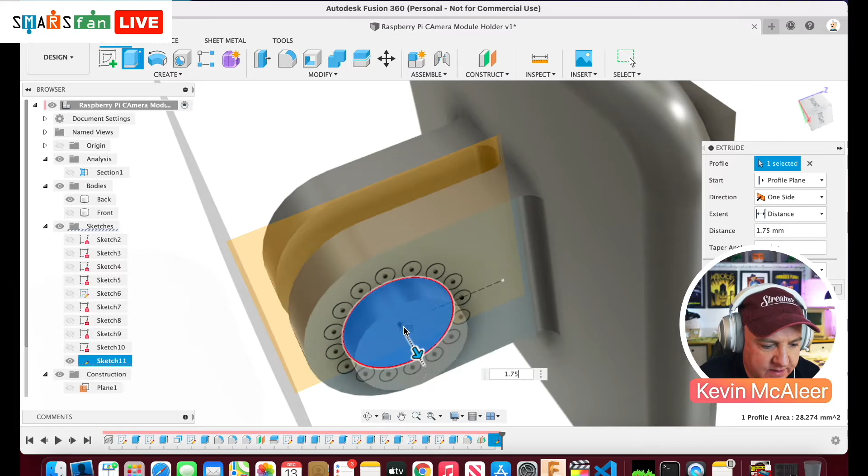And the reason we created this mid plane is because we want to mirror that across to the other side there. So we can actually select that on the timeline here, this extrusion. We can go to create and mirror.

And we select the object because we've already selected it. The mirror plane is going to be there, and you can just see that on the other side now it's mirrored that across there.

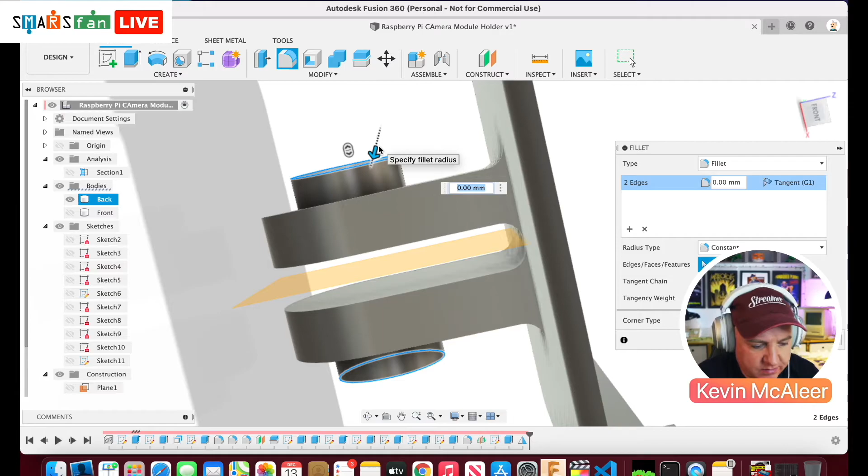Okay, we're nearly done with this bit, so we now need to fillet that edge. So if we just select that and select the other edge as well, which is that one, press F for fillet, and we're going to fillet it in by 3 millimeters.

There we go, so we've now got the dome effect that we're after. Just see that now. And what we want to do next is push those small circles that we created all the way in by 0.25 millimeters. So if we enable that sketch so we can actually see them, that means we can now select them.

So let's go and select them. This might be a bit tricky, so I'm going to have to zoom right in to do this. Let me zoom right in.

And what we need to do now is press Q for push pull, and we want to push them in by 0.25, so that's minus because that's actually coming out. There we go, they've now gone in.

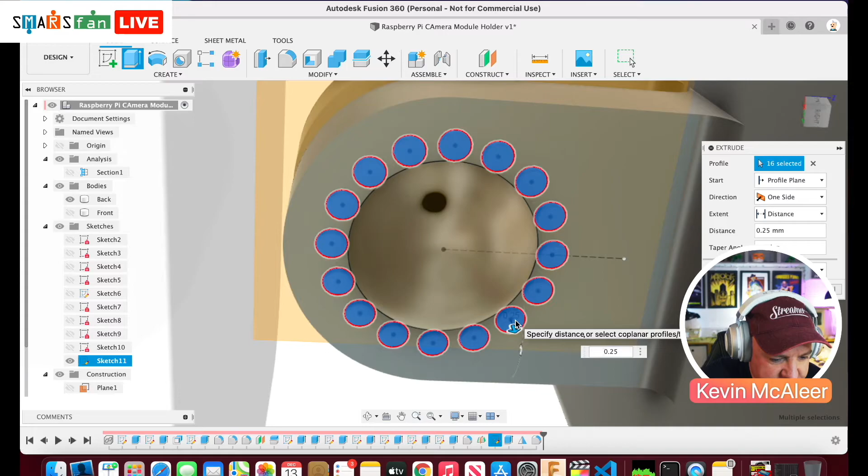So if I turn off that sketch, you can now see that they now go inside, but they're quite rough. There's quite a sharp edge to that.

So the next thing we want to do is fillet those edges by 0.25, and then we can mirror that across. So again, we just want to select the outside edges of these. Now that we've selected them all, we can now press F and then 0.25.

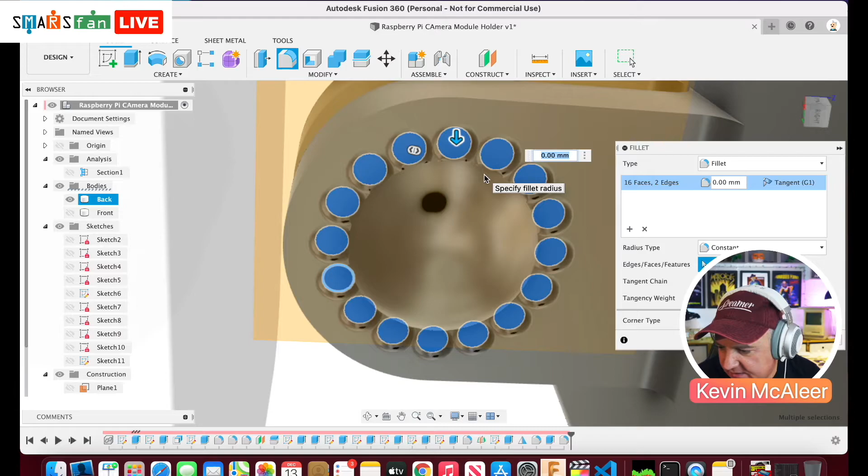There we go, and we want to also select the inside edge as well. Press F for fillet, and I think that is, let's try 0.5, see if that works.

Yeah, that's good. Okay, so if you look now to see that, you've got this dome and you've got this sort of gripping effect around the outside.

So what we want to do now is mirror those. So if I go to where we created them, so there was that one and that one. It's on the bottom timeline. I'm selecting all those 3 features.

And I'm going to mirror that using the mirror function. We're going to select the mirror plane as there. I'm going to click OK.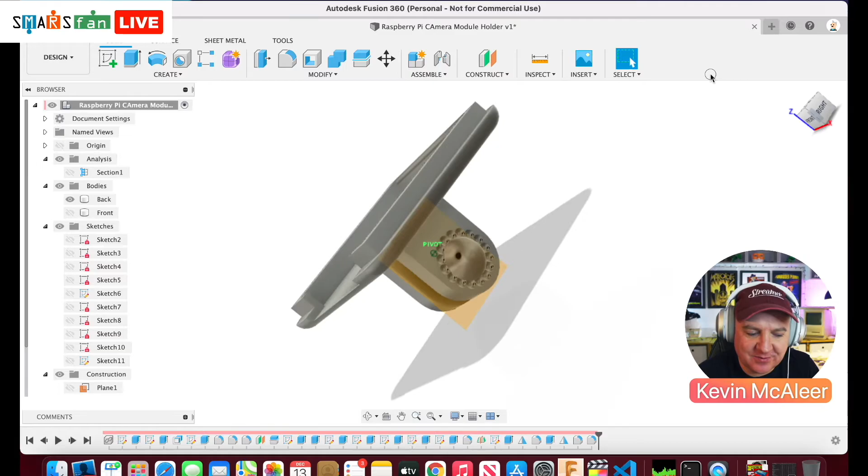So now we have our dome sections. We've got our sort of, I don't know what you call them, those bits that go in. We can get rid of our mirror plane, construction plane off the view there.

And we are not far off finishing this now, so let me just go through the notes and see what else we need to do. I think we just need to do the top hole for the camera, and I think we're then done.

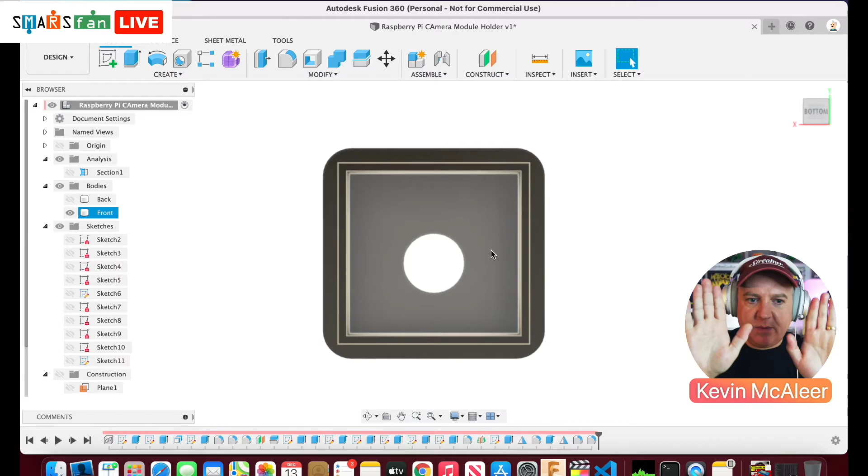Yes, so let's go back to the front piece, and let's flip this round. There we go. And this is similar to the bottom piece in that there are 2 areas either side of the lens. So if I just show you that there, either side of the lens, where the lens is sort of stuck up, we need to create something that can just give them a bit of support so the camera can sort of be pushed through like so.

So we need to get that area, that face inside. We need to create a sketch, and we need to create some rectangles that are 5 millimeters from that edge there. So if we do that to there, we just dimension that to be 5 millimeters.

We do the same on the other side, so from that corner to somewhere on the bottom, make them the same as that dimension there. Hopefully you can see that. So they're 5 millimeters and 5 millimeters, and then we need to end the sketch and then just push pull them out.

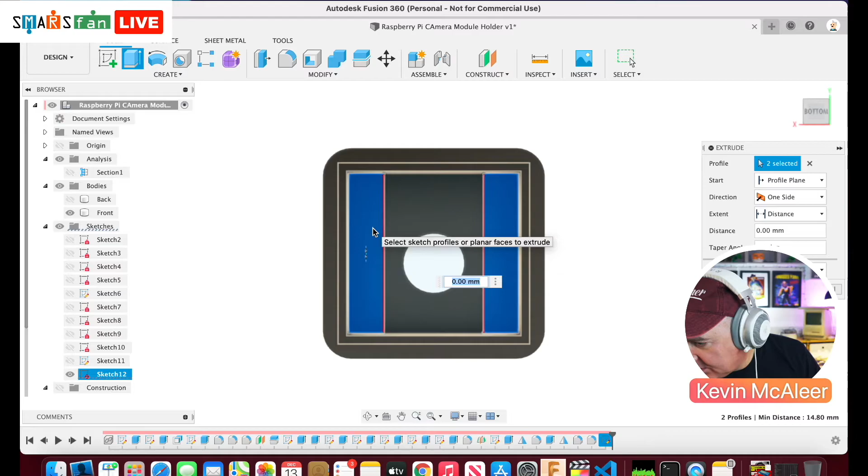So that one and that one, Q to push pull, and we want to pull this out by 0.5, so not very much. So 0.5.

There we go, so there's just a very slight lip that you can see. Okay, and finally the bit where the ribbon cable goes in, we need to...

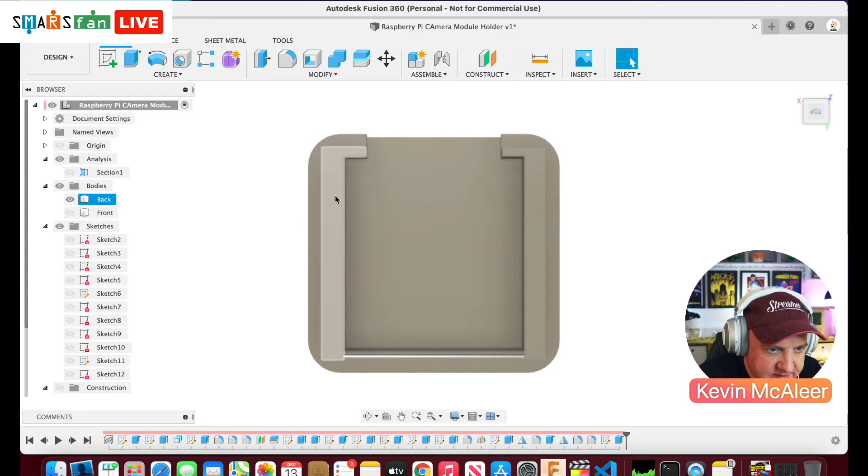Let me just find that on there, we need to just cut out a section of the bottom piece. So on this bottom piece we just flip this round, just here, this area here and this area here, I mean let's just spin it round so that's on the bottom. We just need to cut out a little piece because that isn't quite wide enough for the ribbon cable to sit on.

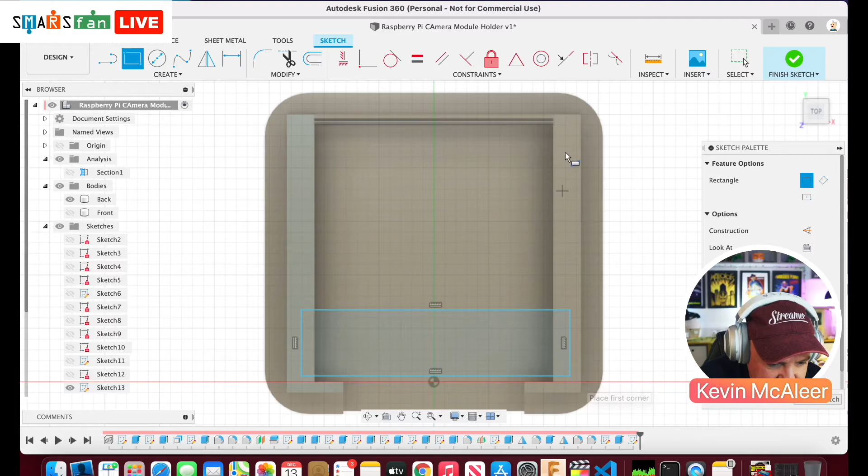So what we can do is just create a sketch on there. Let's just zoom in to fit, and let's just create a rectangle roughly where we want it to be, and then let's just add some dimensions. So from that edge to that edge there should be 2 millimeters.

Let's see if it's happy with that, and then from that edge to that edge there is also 2 millimeters, and the height of it is 8, so the height of that is 8 millimeters, and that bottom edge is collinear to there, and that's it.

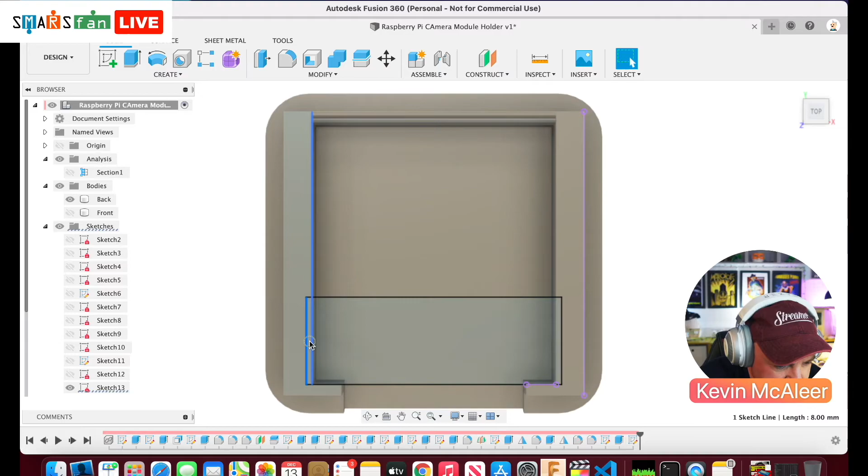So then what we need to do is just cut away those pieces that have just been created there, and we are done. So let's just try and grab that piece and make sure that's got it okay.

Yep. And we want to pull that down to this bottom face. So where the distance is, we say to object, we click the bottom face and we cut it out. That's exactly what we need.

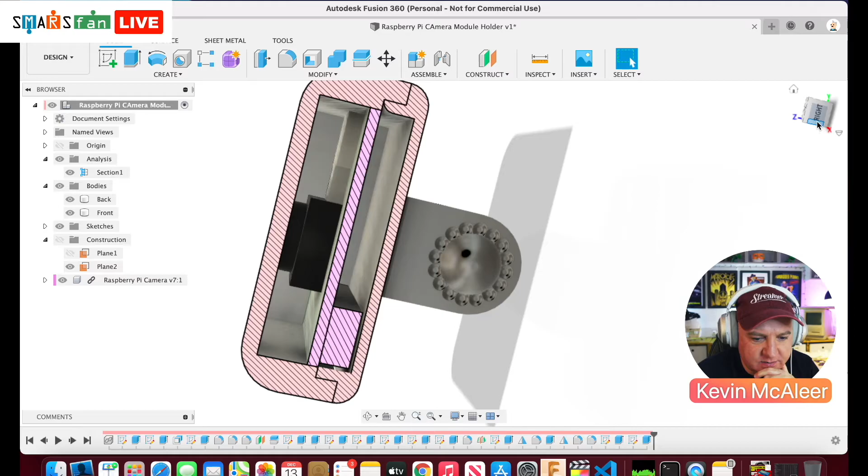Perfect. So that's the bottom piece done. We have a top piece and a bottom piece. Let's have a look with our section analysis to see when we've got the two pieces stuck together, and let's also include the Raspberry Pi. So if we just come and enable that again, let's have a look at what that looks like. So you can see there, this is now sat nicely in there, and that will work for us.

Okay, so the ribbon cable can come out the bottom there, which is good. Okay, so what we need to do next then, let's turn off that section analysis and have a look at it.

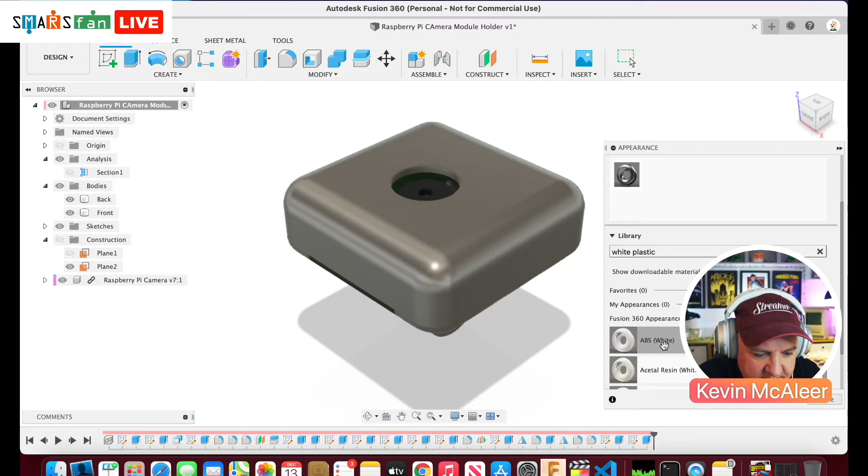If we wanted to add some colours to this, we can press the A key for appearance, and we can just do a search. So if we wanted to look for some white plastic, we can quickly find some pieces that look right for us. So we've got ABS, we have plastic matte white. Let's throw that on there, see what that looks like.

And then for the bottom piece, I'm going to do a yellow plastic. So let's just do yellow plastic. Oops, try that again. Yellow plastic, and yellow matte. So if I just drag that onto there, so we've now got a top piece and a bottom piece, which are kind of color coordinated. There we go. That is what we were trying to create.

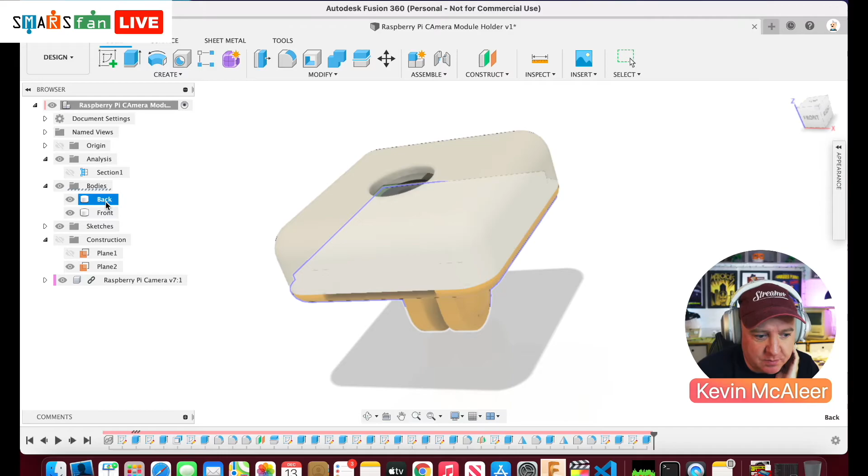So if we want to save that out and actually 3D print that, this is really easy. So we right click on each component. Oh, there we go, we can do save as STL. And if we just save that out, there's a little menu here, we just click OK on that. And it's going to ask us where we want to save this.

So if I just click OK there, and then do the same with the front piece, I'm going to just right click, save as STL, click OK, save that as front. And now if I just go into my Finder window and go into that folder where we've just created these, let me just bring this up as date sorted. So we've got two files, front and back, and if I show you that one there and then that one there, we can now bring them into Cura and print them.

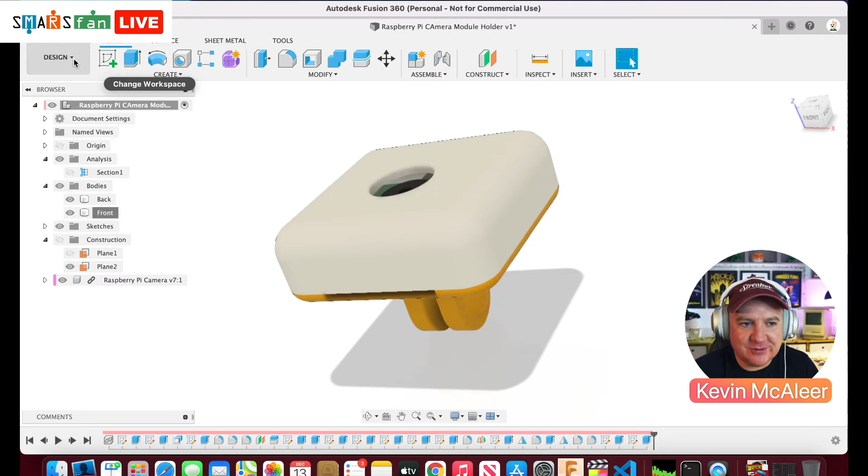So we've now created a piece from scratch that our Raspberry Pi camera fits in, and we know it fits because we've looked at this. We can look at it with the section analysis and we know that it will perfectly fit within it. And we've designed it around the dimensions of the camera that we started out with, so we know this is good. If when we print this we find that it doesn't actually fit, it's probably down to the measurement and we need to go back with our calipers and just remeasure things. But overall, that should work fine. And I've certainly printed out 2 of them using this exact design, and it works fine.

So there we are. Let me just save that, click OK, and let's go back to our keynote. Let's have a look where we're at.

So, as I said, you can save the top half and the bottom half using that save as STL, and that means that we've then got a copy of it forever.

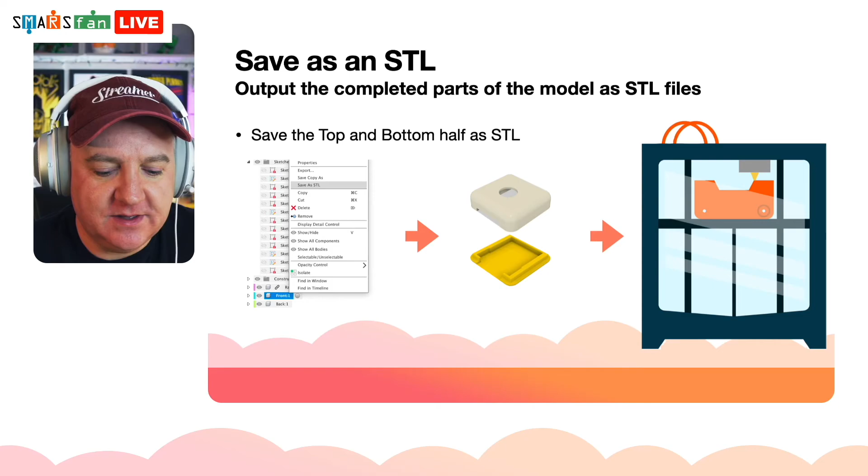If they have the instructions on how to do this in something like Fusion, I'll write this up and put this on SMARS Fan as well.